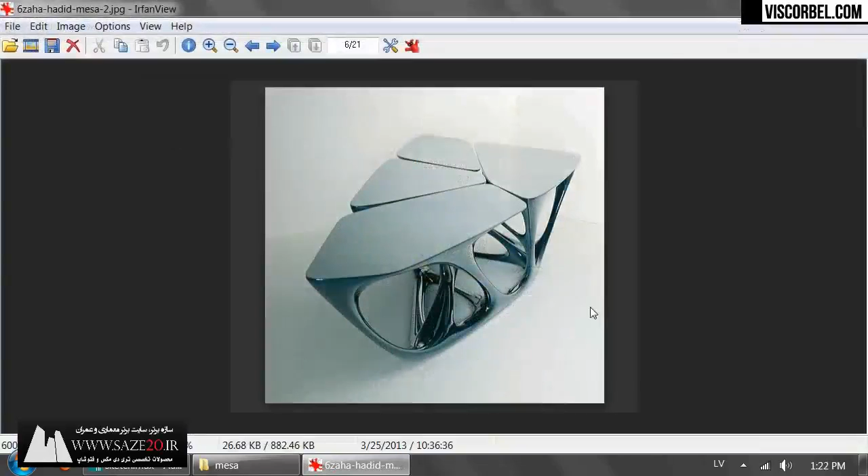So even though this model appears to be very complex, and it has these crazy organic shapes, it's actually not that hard to model. So I think one of the most essential steps for this piece is creating a nice reference sketch. So I've done exactly that.

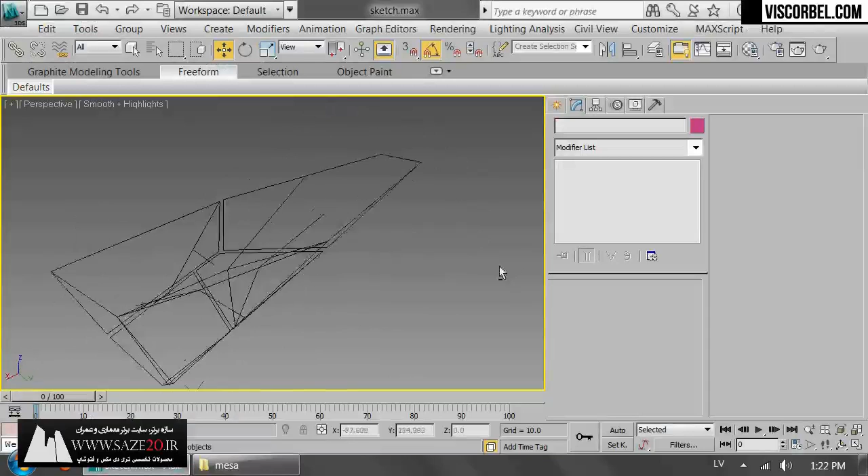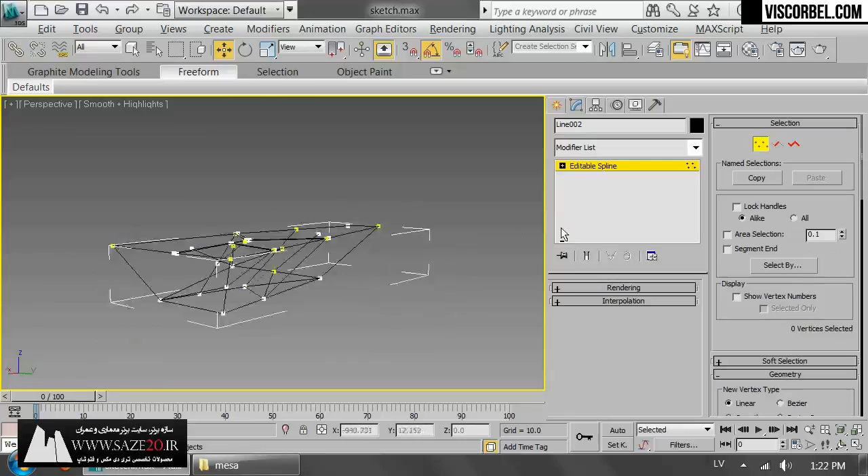I started by drawing the splines of the top. Okay, here they are. Then I drew this triangle on the bottom, and then I just tried to replicate these connectors from those reference photos. And I'm not 100% sure it's perfectly accurate, but I think it's going to be close enough so that nobody is going to be able to tell the difference without spending some time comparing it to the reference photos. So I think it's going to be okay.

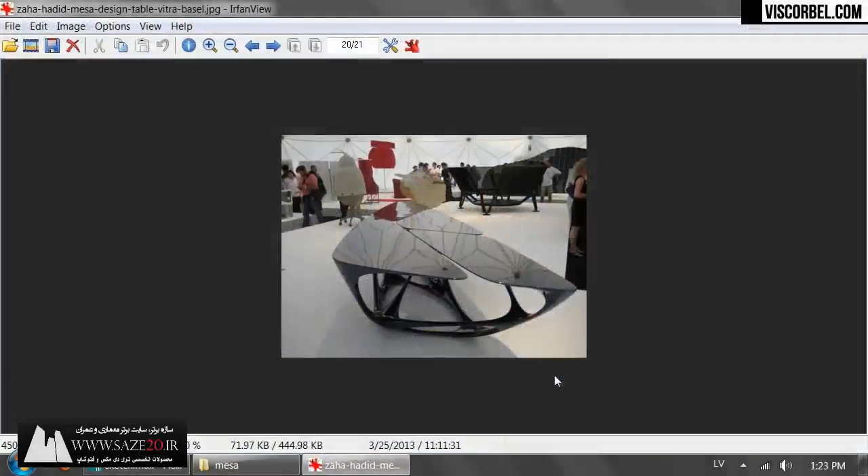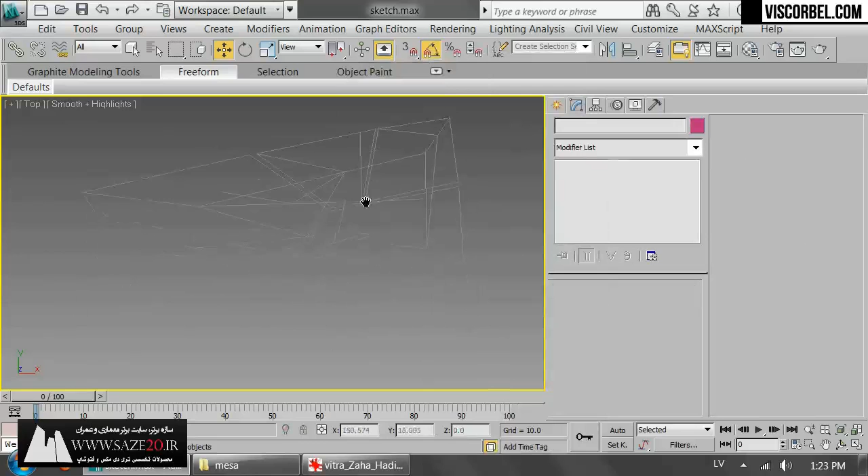Right, so the sketching part was a bit time consuming. I just went through these photos and tried to see where these connectors come out from and where they end up, and just try to sketch that in this 3D model. Well, it's not a 3D model yet, it's just a spline sketch. Okay, and I'm going to use this as my reference. So let's freeze it and change my background to solid color.

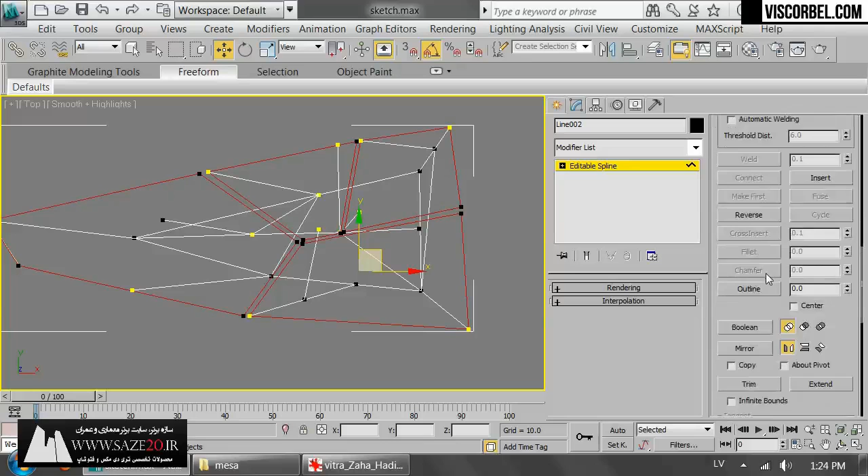And let's start with the line. Actually, we can duplicate the line from the sketch. And let's start with these lines that represent the top of the table. Right, I'm going to detach them. Okay, where is it? Let's detach a copy. And let's freeze it. Right, so it's a pretty rough sketch. I'm just gonna even it out a little bit to make sure all these distances are pretty much the same. Okay, like that.

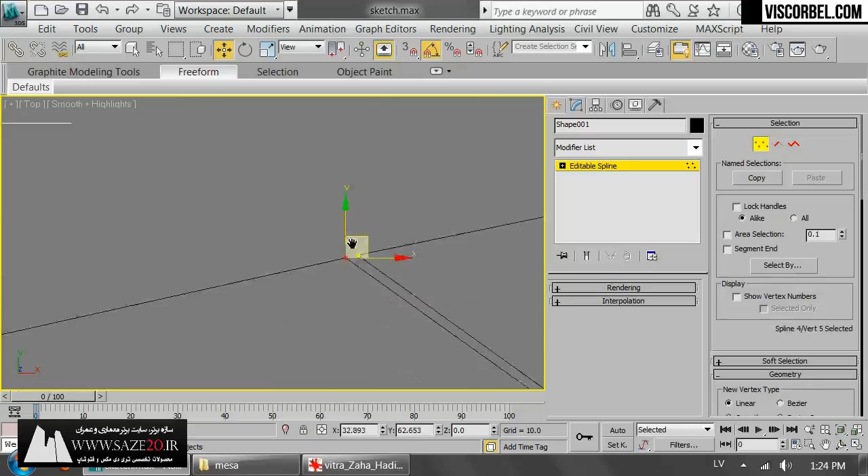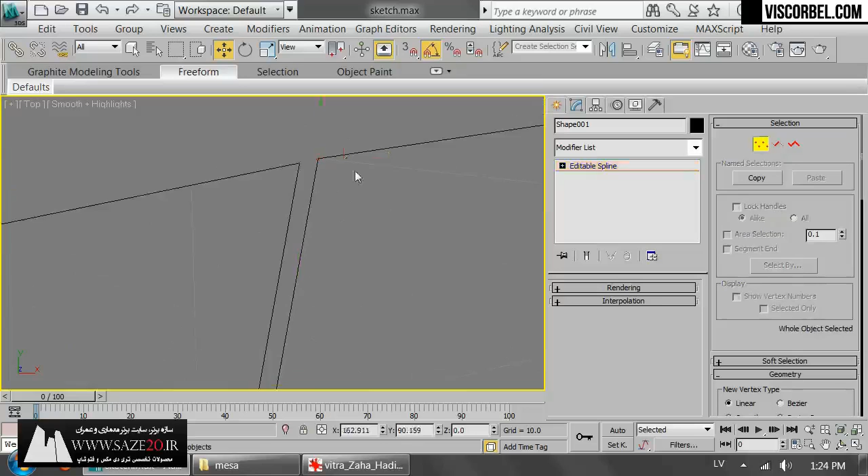Alright, let's move this one a bit downwards. Okay, so I think it looks good. And this is going to become our tabletop. I'm going to collapse it to editable poly. And now let's add some support edges to make sure these corners are rounded exactly the way they should be.

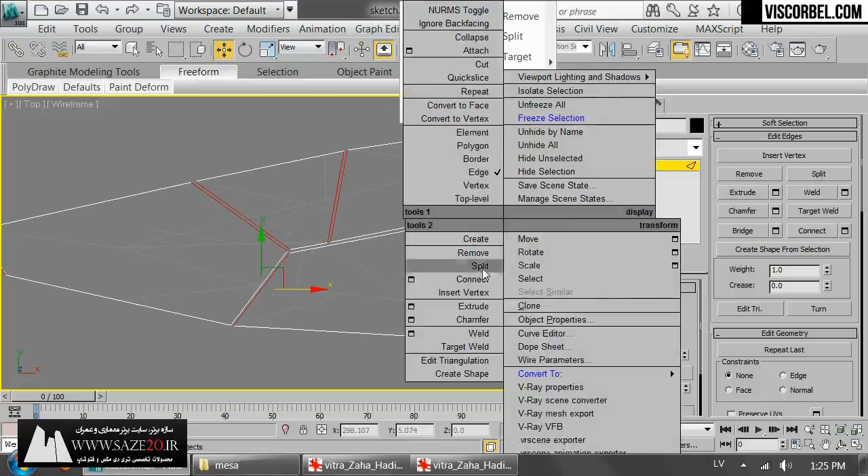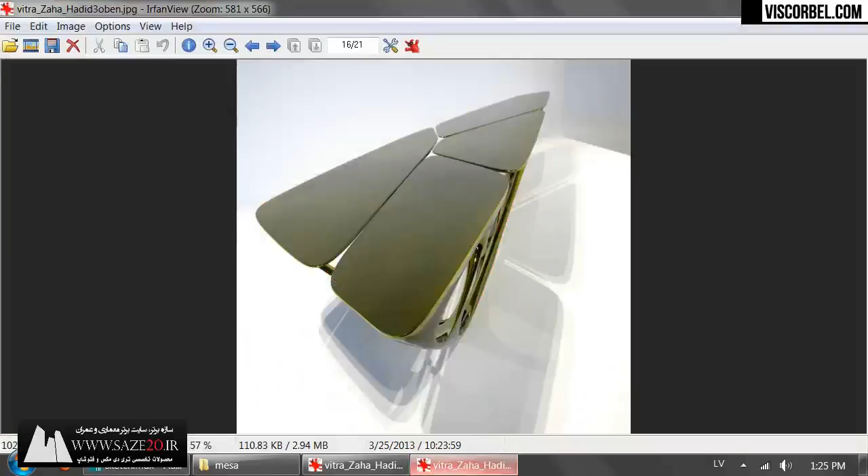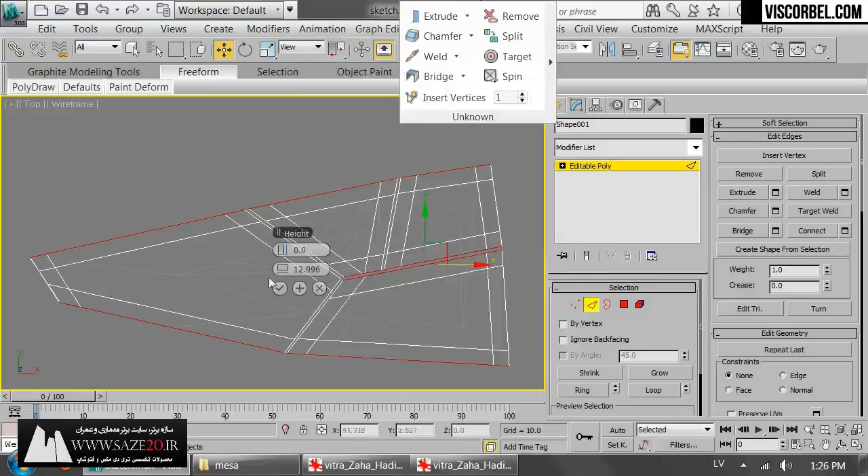So what I'm going to do is I'm just going to select some of these edges like this, and I'm going to use the extrude tool. Make sure you set the height to 0 and just modify this width to change the offset from the edge. Okay, I think something like this might be good, maybe a bit more. Okay, and that's fine. And let's do the same thing for the other edges. Extrude, use the same settings. And one more here. I think that's fine.

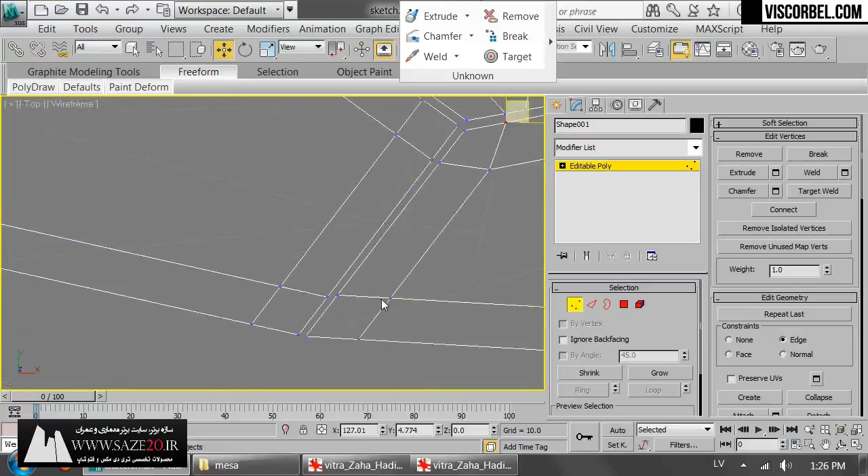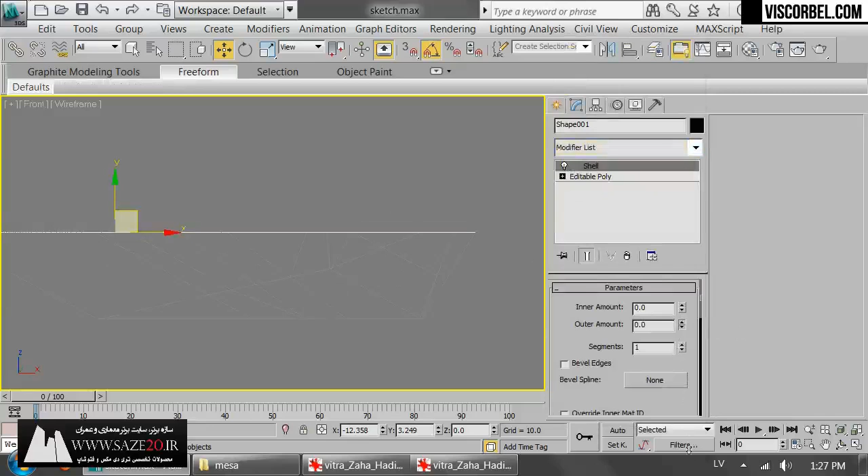Right, I'm gonna adjust some of these vertices manually. I'm gonna enable the edge constraints so I don't accidentally change the shape of my edges. Okay, like that. Make these wide corners a bit thinner. And maybe let's try and see how it looks by adding some shell. I think it's pretty thin. Something like that. And turbo smooth. Okay, not bad. I think the seams are a bit too large.

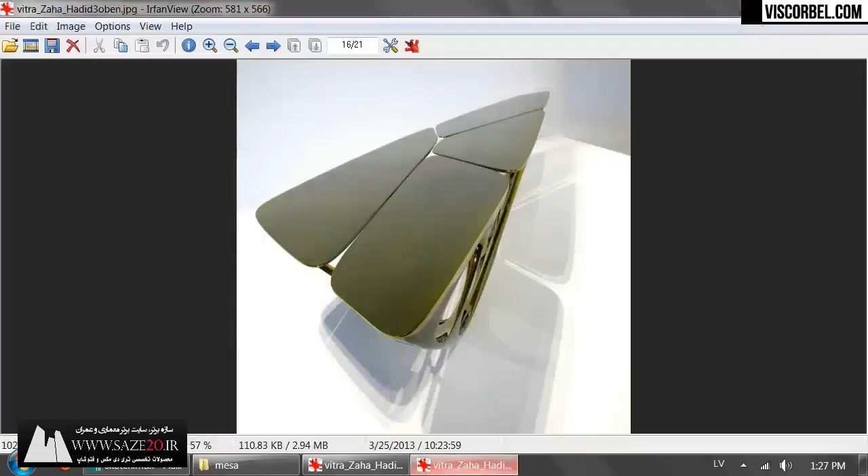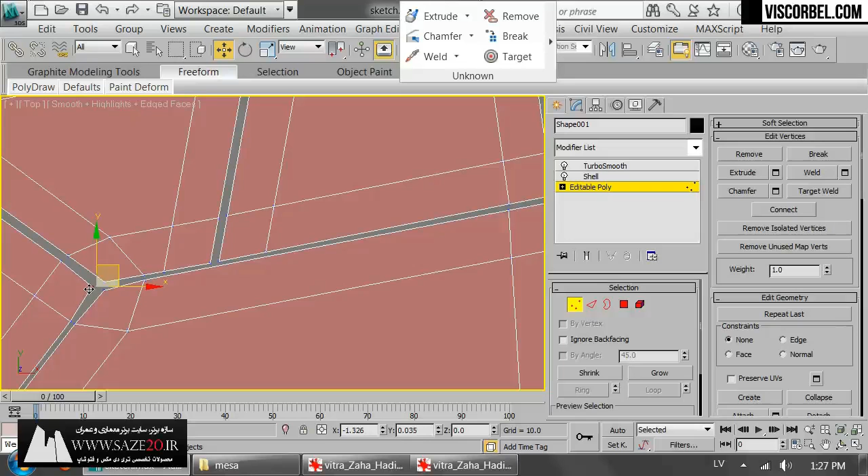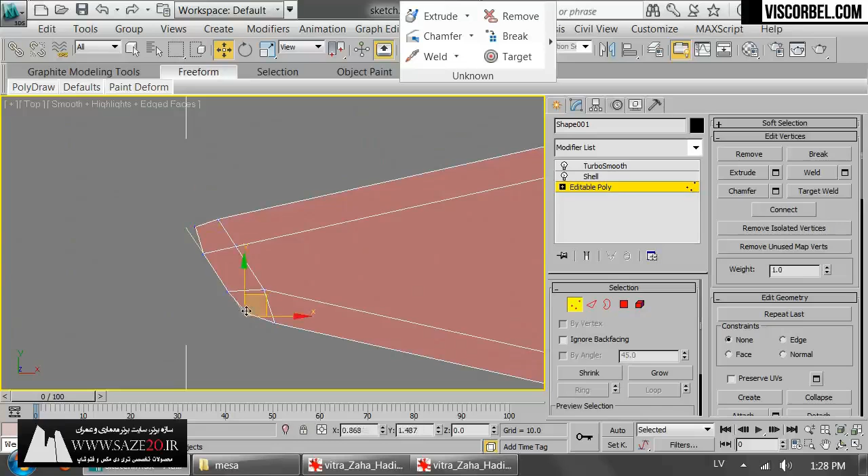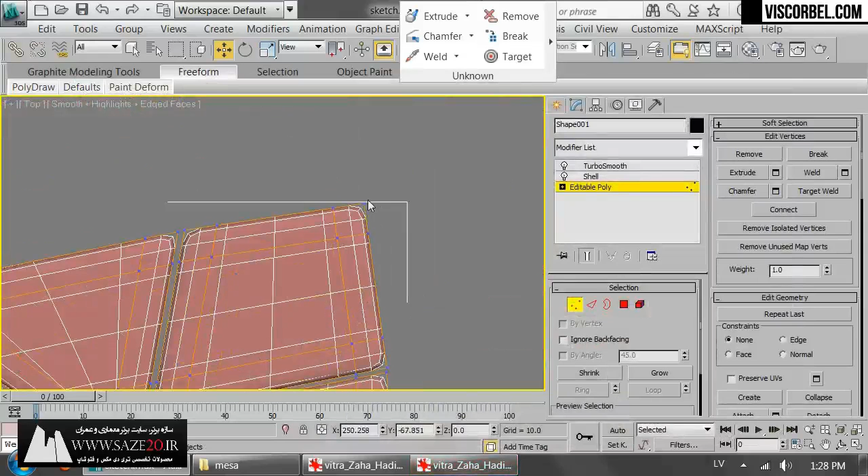So let's turn off those constraints and maybe just make those closer. And since the shape is so organic, we can get away with some imperfections. Okay, and just round the corners a little bit. And you can turn on the preview to see exactly how they're gonna look in the end. And let's maybe bring this edge a bit to the left.

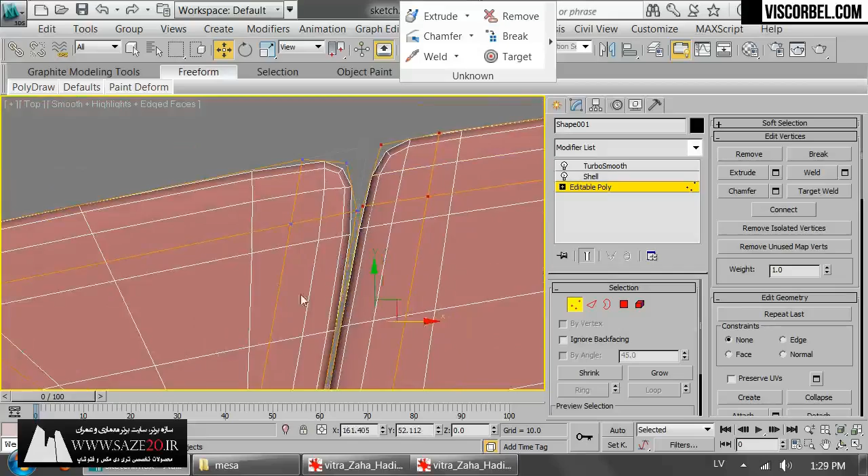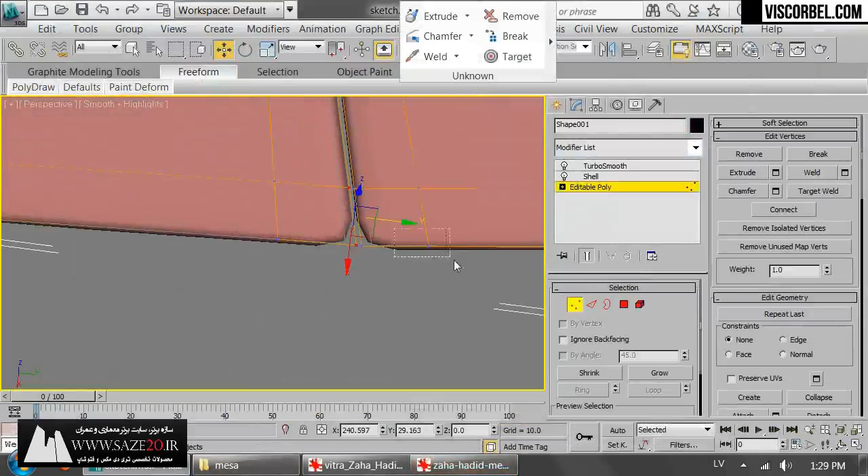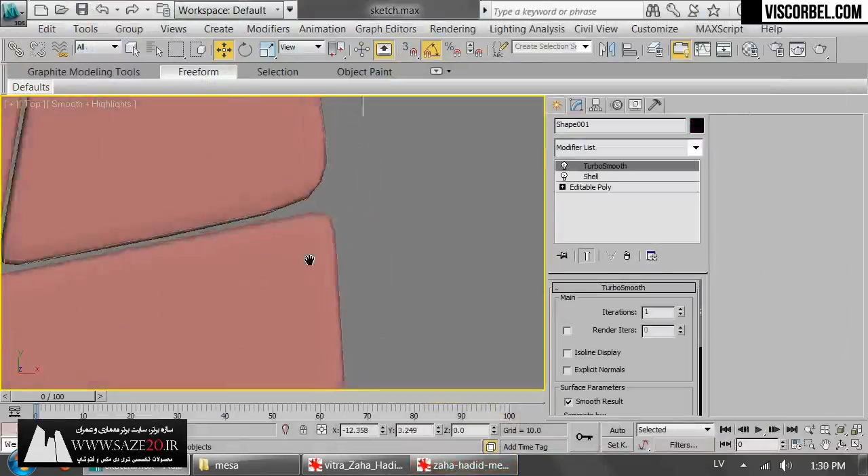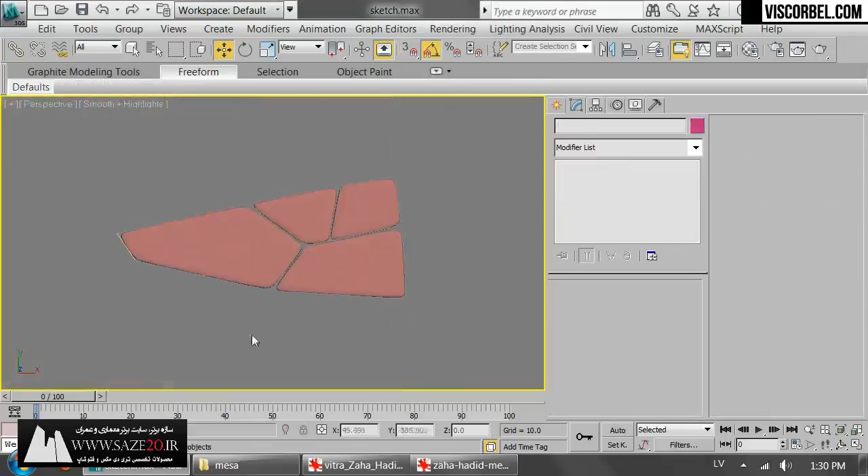Alright, I think the basic shape is okay. Looks somewhat similar to the reference. And that's gonna be fine. Okay, so now I'm happy with the top, and we can proceed by making all this complicated mesh below the top. And I'm gonna approach it using some very simple techniques.

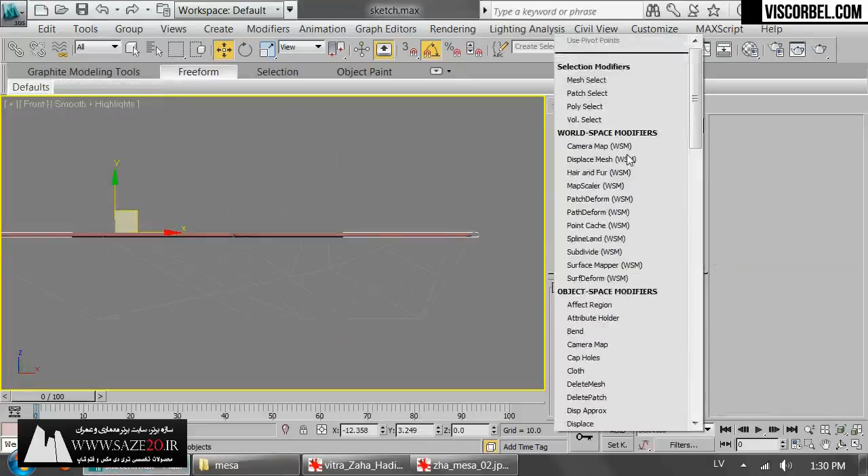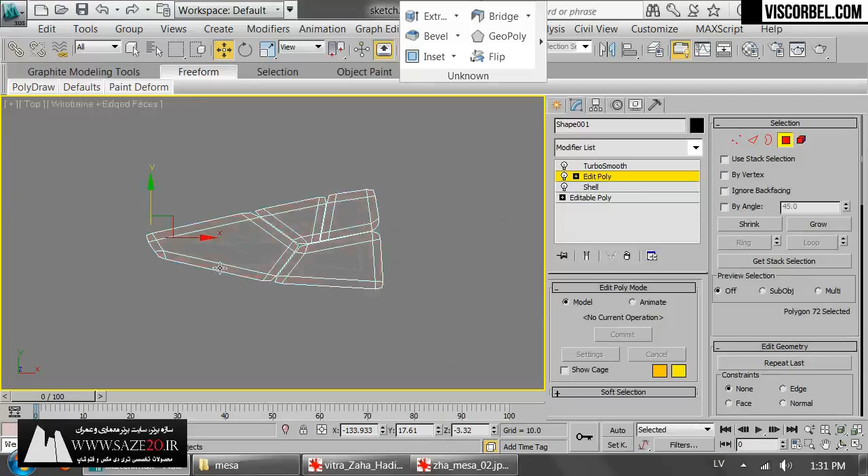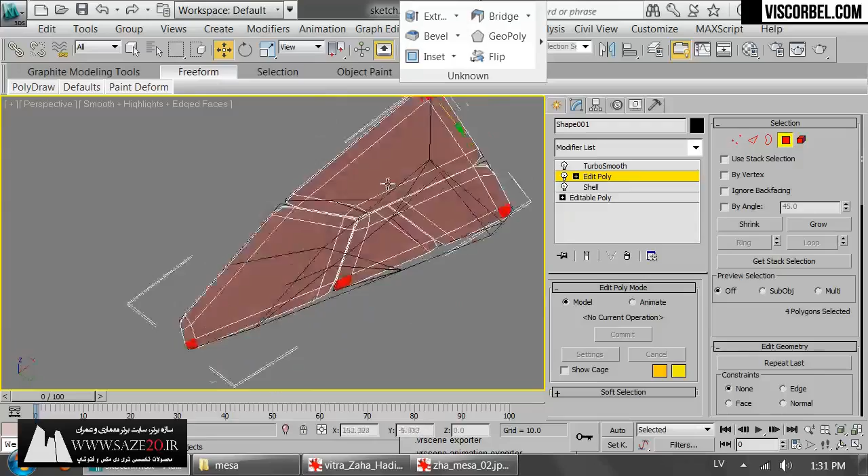So what I'm gonna do is I'm gonna add an edit poly modifier above the shell. Turn off show end result, and just start extruding the parts that I think should go down. So for example, you can see that I need to extrude this corner. Okay, I'm gonna unfreeze it so I can see better. So this corner and this corner. Okay, and this one, and this one, and I think that's okay for now.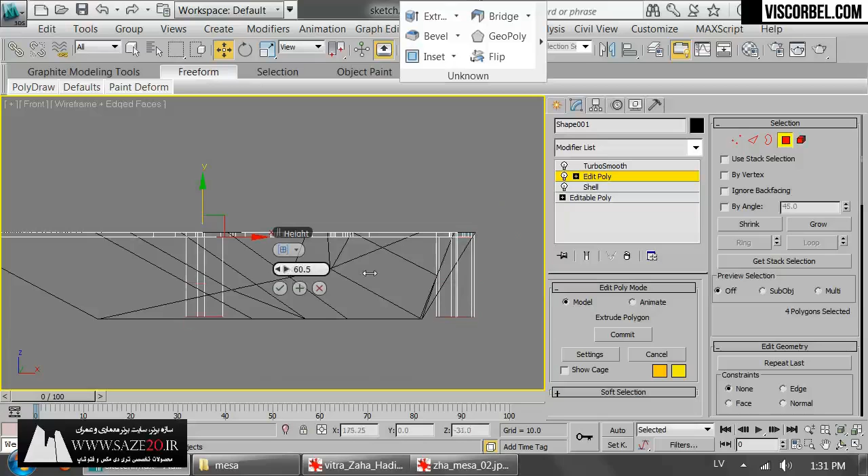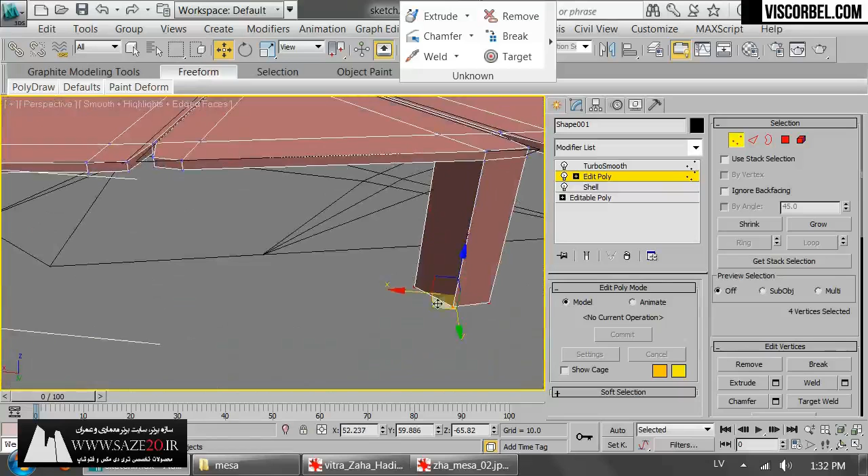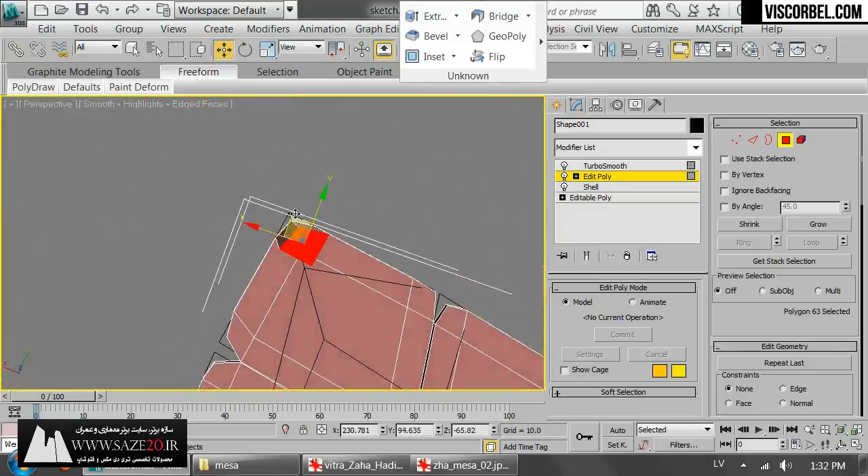Let's extrude them, and let's make it all the way to the bottom. All right. Then just move them to match this triangle on the bottom. Okay, so this one is a bit wide. Let's maybe rotate it a bit and move this vertex like that. Alright, next up this polygon. And this one as well.

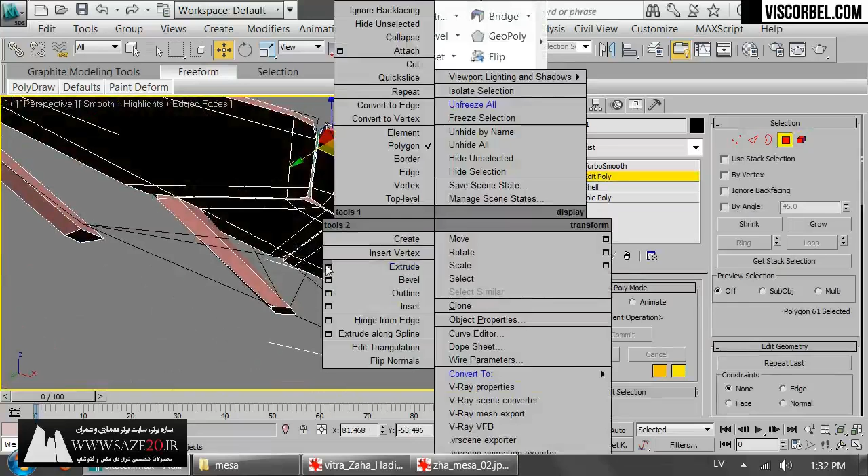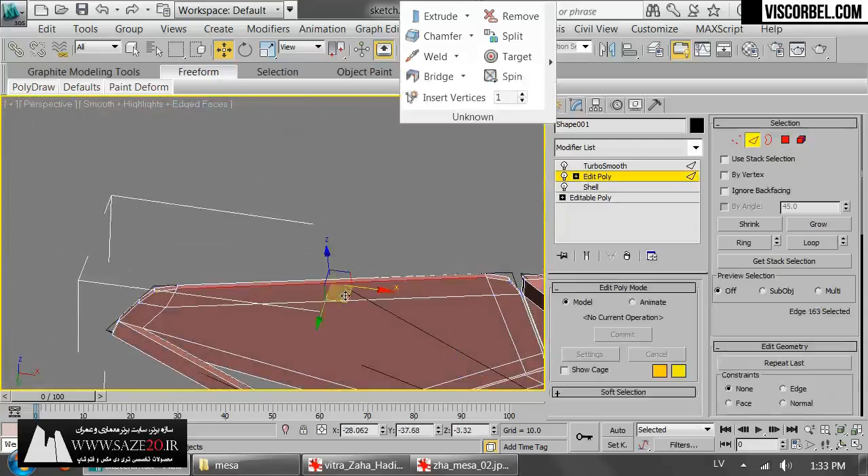Okay, looks like we need to extrude this corner here and move it over here. Right, and now it seems that we are missing some edges here if we want to extrude from this point. So okay, so I'm gonna add some edges here just by using the connect tool. Okay, and slide it maybe slightly towards the center here and chamfer it. I think that's fine.

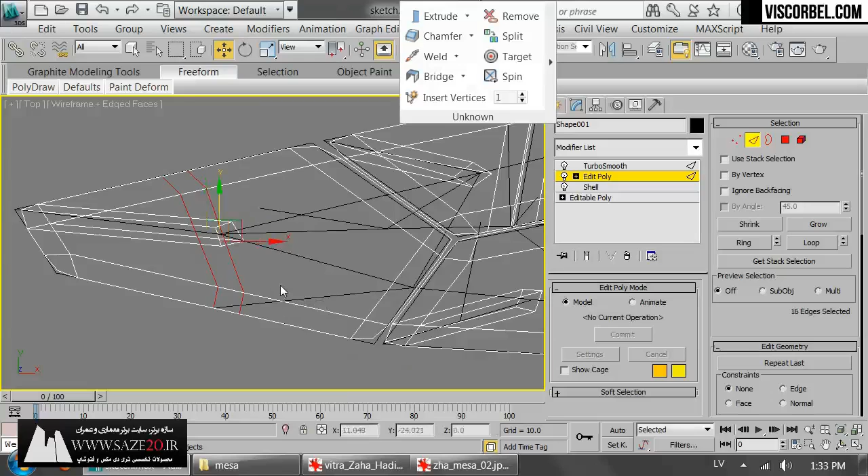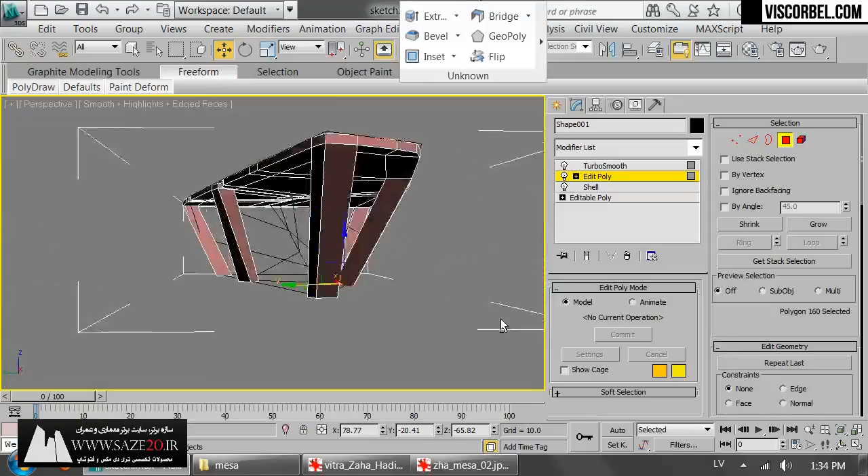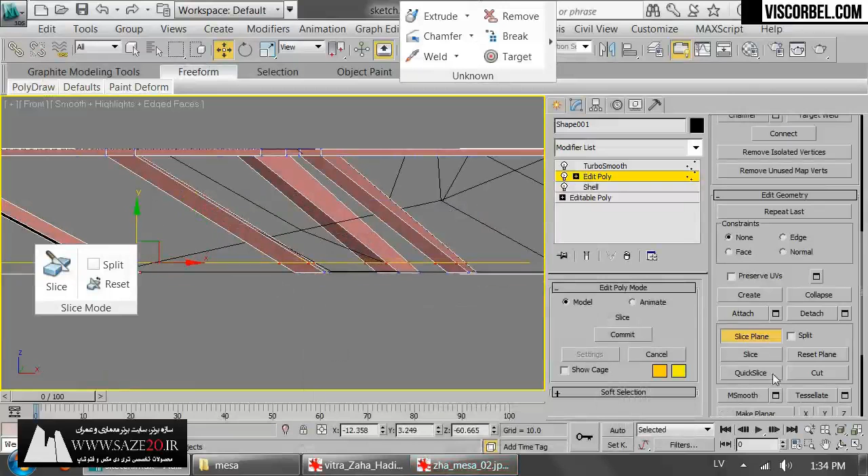And now we can take this polygon on the bottom, extrude it, and move over here. Alright, so these are the basic legs. Now let's connect them together. So to do that, I'm going to use a slice plane. Let's look at the reference. Okay, maybe a bit thinner, like that, and just slice it in. And now you can just basically select some polygons and bridge them together like this.

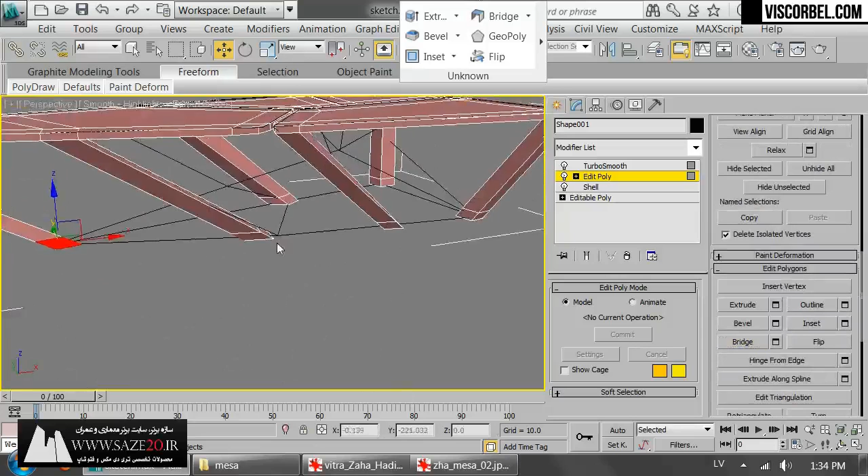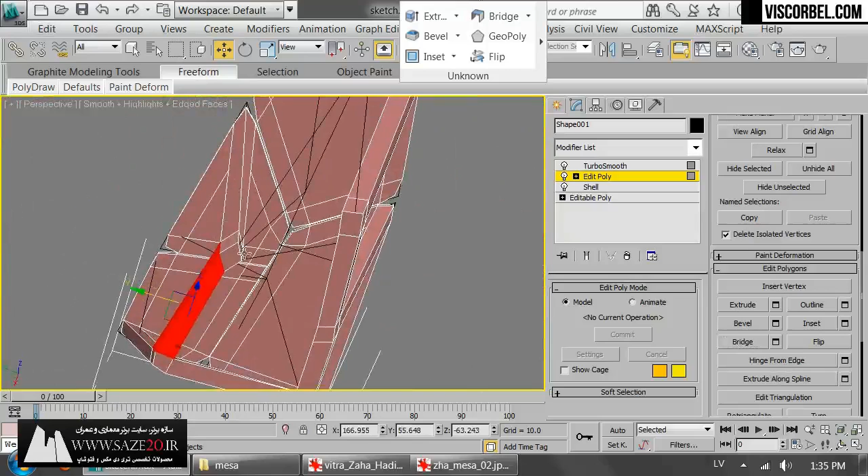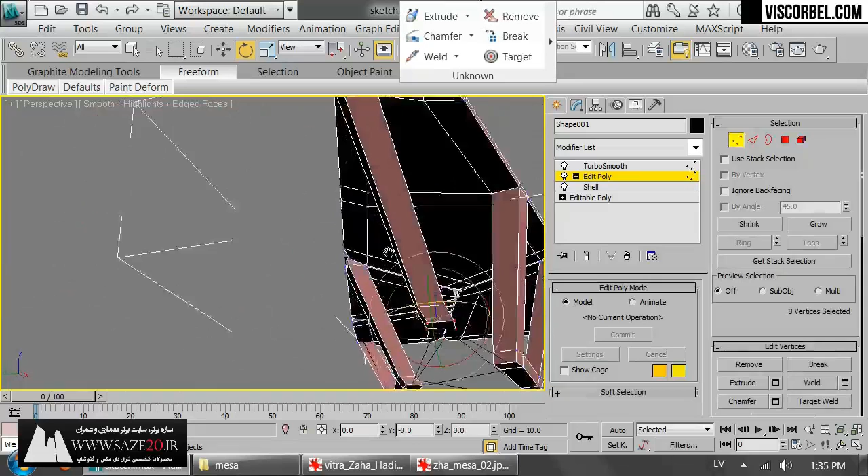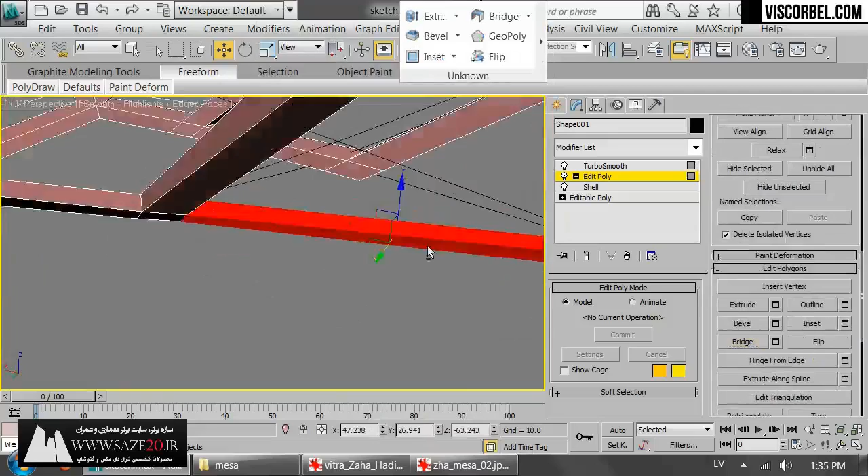Okay, maybe let's start over here and just bridge together. Alright, looks okay. Maybe let's rotate this back a bit. And I'm going to connect these two edges so we can connect two polygons to here. So the one from here and the one from the other side, both can connect at this point.

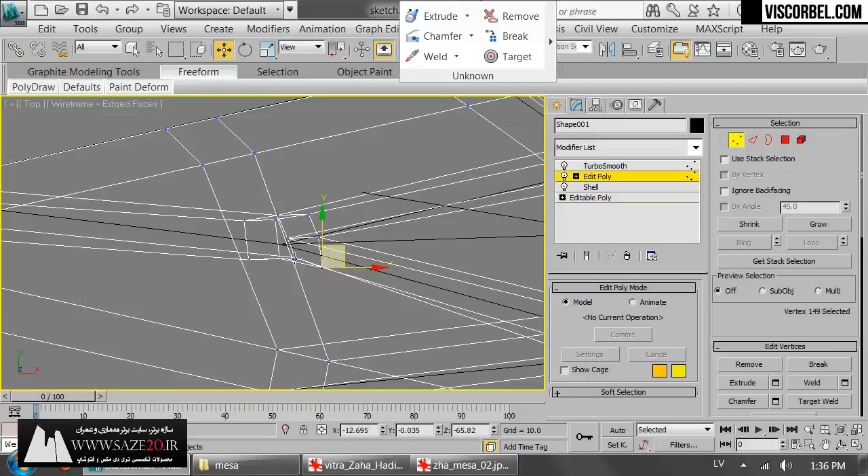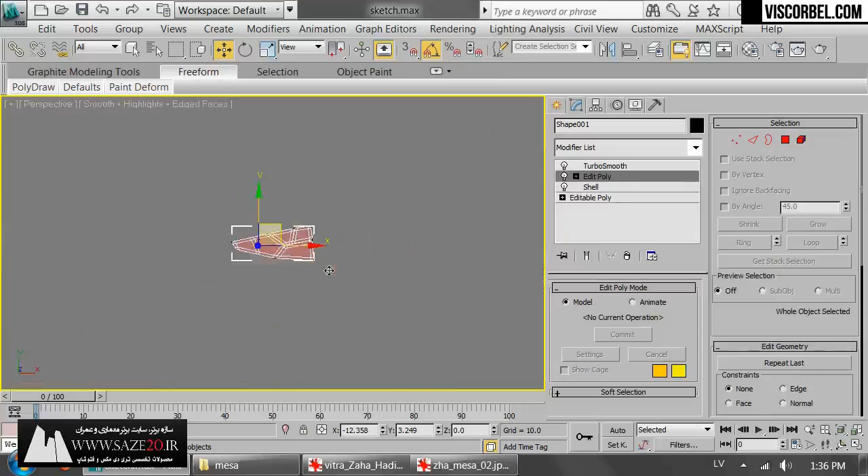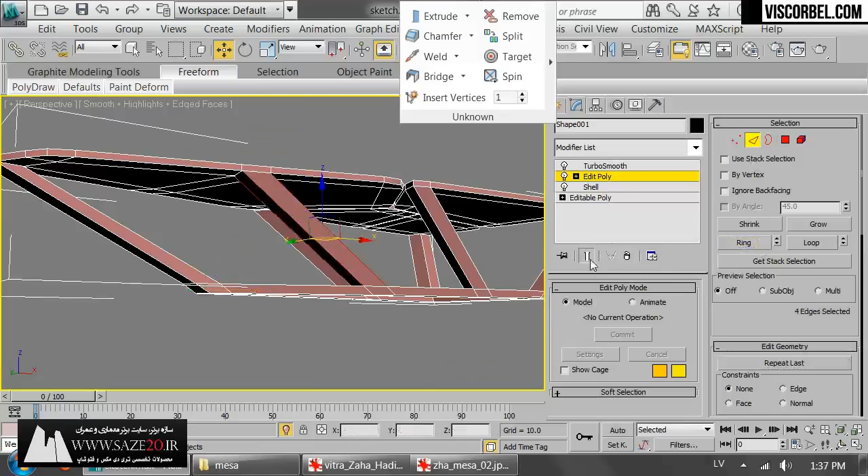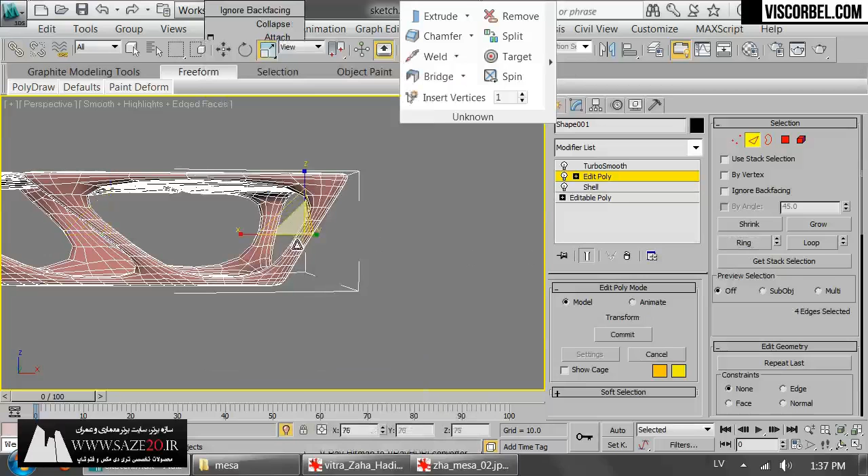Right, let's adjust the shape to make it nice and smooth. Okay. And let's see what happens with Turbo Smooth on. And you can see the shape already starts to look quite similar to what we have here. But perhaps some of these pieces are a bit too thick. So what I'm going to do is I'm going to select some edge rings, connect, maybe even scale it a bit smaller, like that. Okay, great. Moving on, and just go all around the table and fit those